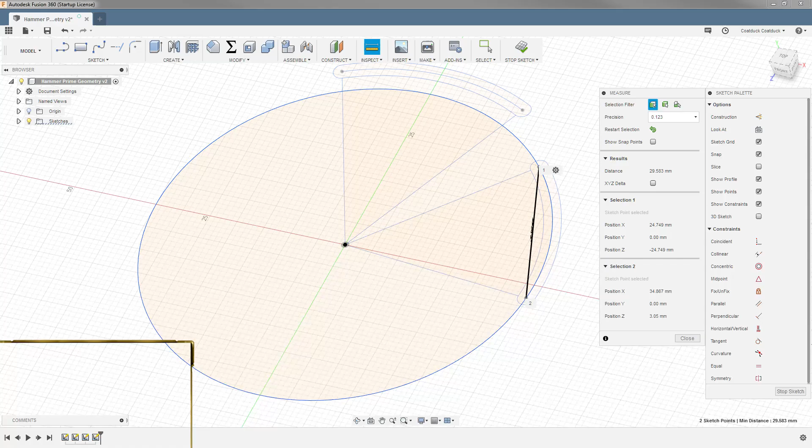What? Okay, now I feel like less of a dunce, because this is definitely Fusion fucking up. Yeah? Okay. And now I can move. Alright, it's fine. Everything is fine. So that distance. Oh, thank you. Eleanor, say something in chat. For fuck's sake. Okay, maybe I'm not such an idiot. That was impressive.

Is this a complete blaster made from scratch? Is it made from scratch? Yes. Is it a complete blaster? No. I would like to think of it more as a prototype thing, just to get geometry correct. So it's not going to be something that I'm going to take to a war. It's something that I'm going to build and put in my pocket, or not at all. I'm going to build it and I'm going to test with it, and then that's going to be it.

See, I'm not sure why this isn't a precise... Did I measure this in degrees? God, do I have to go back and watch my own stream? 50 degrees. Okay. Eleanor now wields the oof hammer. That's funny. Okay, so let's look at that sketch. So this is the Hammershot geometry, and the Hammershot has really nice geometry. So I'm probably going to take a minute and just try and remember what I was doing before.

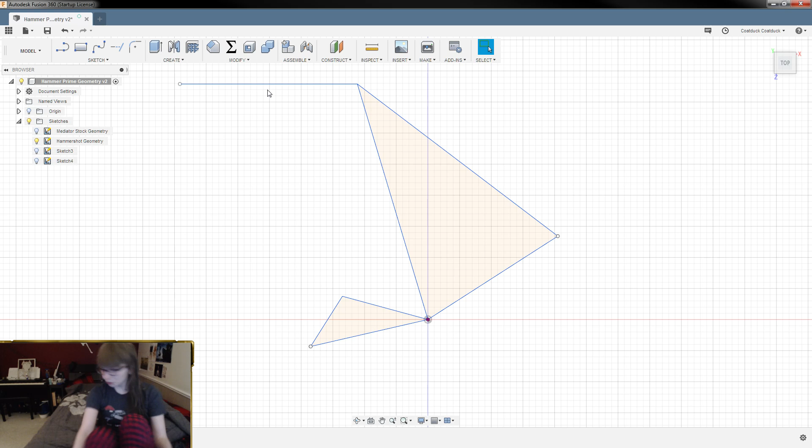Oh, I have a space mouse I could be using. Hold on. A lovely patron of mine, David, who's working on some really cool stuff actually, sent me a space mouse. And I'm just getting used to using it, so you guys are gonna have to forgive me when I flail around like an idiot with it. So far I have learned to not completely screw up with it, and programmed memes into it, so I need to get better with it. I'm told it can be quite productive. The only problem is I don't have room on my desk for it. If you look at my desk, the mouse is half hanging off the desk. I got my touch monitor, main monitor, and then side monitor, so it's a mess.

Let's get that open. Alright, now I can spam memes. Alright. Hey, is it not? Do I have to reinitialize Fusion in order to make this work? I'm not sure. Hold on. I think I do. Now you can escape capitalism. It's such a good meme.

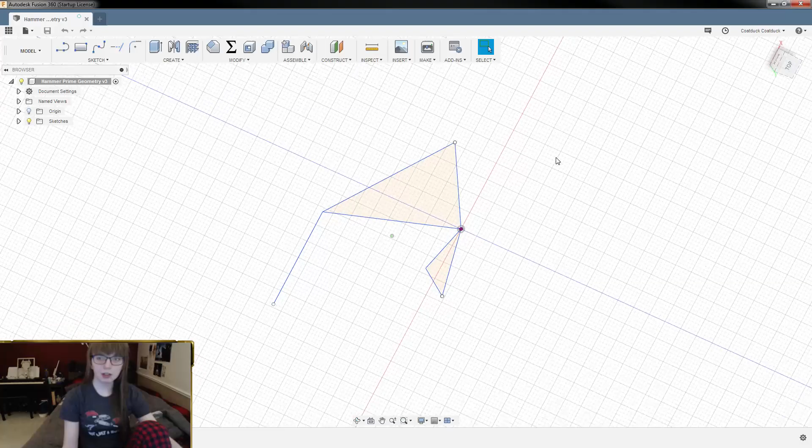See, I'm not sure. Oh hell. I need to get better at this. It's a 6-axis mouse that I'm, like, controlling with my hand, so... Okay, so... So if I'm remembering correctly... Okay, that's just a fucking circle.

I'm good for now. Thank you, though.

Oh, hell. How do I do this? I'm not good at this. So if I'm remembering correctly, what we're dealing with is the seer needs to be... I'm not sure what the correct word is. Tangent? Whatever the... perpendicular to tangent, I guess, whatever that is. Here.

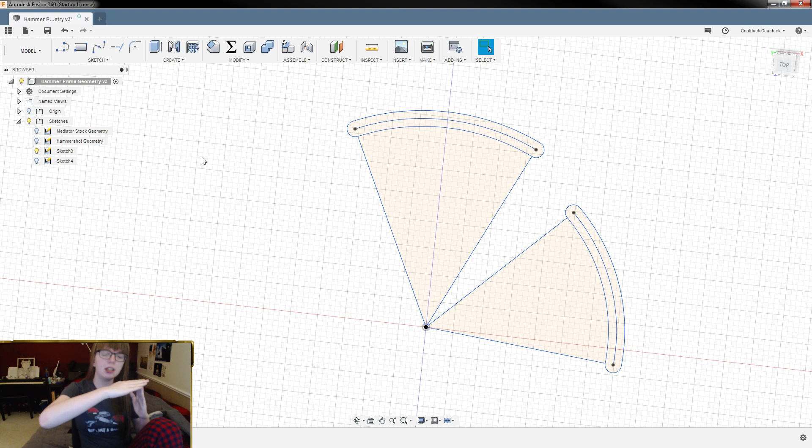Okay, so the distance between the pivot and the seer location, the larger that distance becomes, the more precision you have, and the easier the trigger pull. So we want that pretty decently far away. Now the Hammershot, how far away are these 2 points? Now they're offset, but they're about 19. So we could go 20, maybe even like 22 or something on ours.

There's also no need to specify the location of this, so it could be... Oh no, because you kind of want the seer position to be like flat, like 0 degrees, I think. No, I guess you could move it. Yeah, as long as the seer surface is circular with the radius centered on the pivot, and the seer surface from the hammer comes out from the pivot of the hammer. That could work.

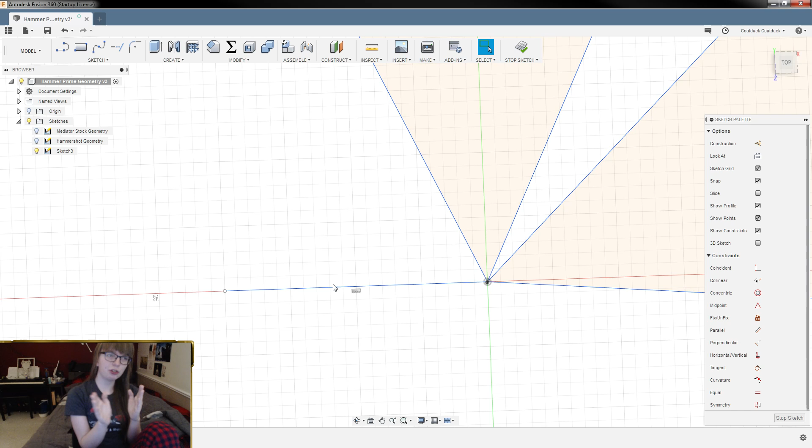Now, the distance from the hammer seer surface to the trigger seer surface will determine how long of a distance you have to pull the trigger to rotate it out of the way. Now that can also be changed by the degrees of motion that you put in. So you could have a larger or narrower surface. However, on a larger surface that's closer in, you're going to have more friction, because you have to move more material across that area.

Oh god, Eleanor, that's horrific.

Okay, so what is it in the Hammershot? The distance from there to there. Okay, so it does just automatically put that there. There's nothing I can do about that. It's 9.5. So realistically, we could go with 10 and get a slightly smoother trigger pull. So our center point is there. Now that is in the primed position.

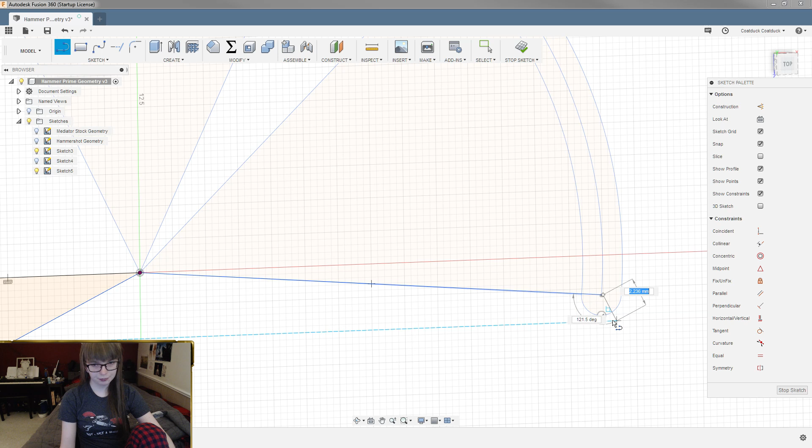So we're looking at the back of these slots. So this line and this line is our top piece of geometry. Okay, so I'm gonna stop sketch and I'm gonna do a new sketch based on this one. Whoa, nope, something wrong. So that's 35 at a 5-degree backward angle. Excuse me. Random hiccup. Hopefully they do not persist.

And this one is gonna be... Still not gonna let me do it, but it's gonna be 39.5? That's obnoxious. Why am I like this? 39.5 and 65 degrees. And I should get rid of that construction line too, because I don't know what it's doing. So theoretically, oh, that's in its primed position. I'm not sure if I want it in the primed position or in the...

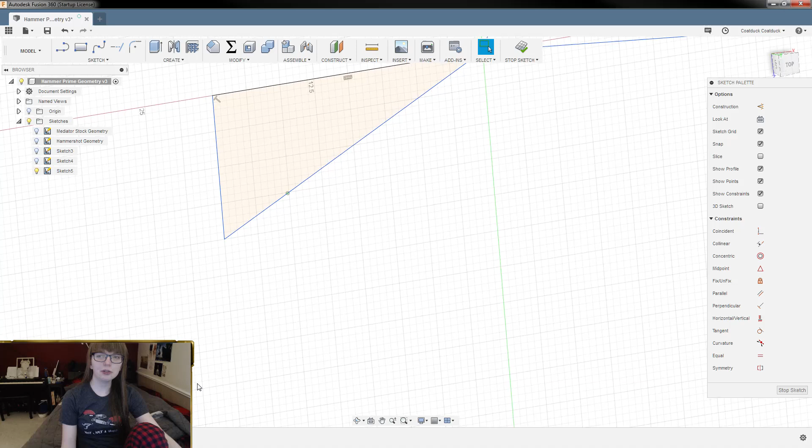Oh god. Seriously, learning to control this knob in 6 axes without accidentally bumping any of the other ones is ridiculous. Okay.

So this means that as our hammer rotates forward, like so, this piece is going to swing downwards. So that's the limit on this, because the longer this arm is, the better, right? So the limiting factor is the trigger well.

I really wish I could just sketch on top of this. I might have to do that.

Why are there only 10 watching? Because not a lot of people... Well, 1, it's Saturday night. 2, there's not a lot of... It's Sunday night. My roommate corrected me. I knew that. I said it wrong. Yeah, so, 2, not a lot of people give a shit about me doing math for 3 hours. Same thing happened on the last stream.

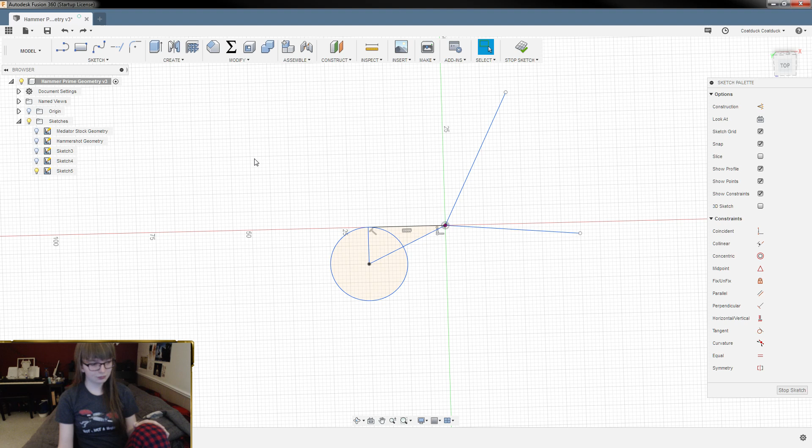I need to bring in a Nerf dart for scale. For real. This is ridiculous. I think I have a box of darts laying around here somewhere that I can steal from. And then calipers. I said calipers. Okay. I got this. I know I've already modeled this before. That's fine. You know what we're gonna do? We're gonna model this in a separate document in my bits folder so that I can import Worker darts for scale. Might even do waffle too because I'm that anal. Alright.

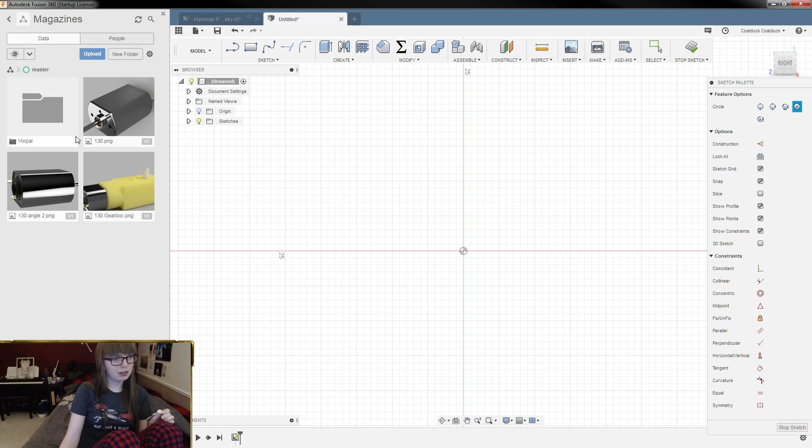Oh, Christ. Looks like my numbers were wrong. Okay, alright. Let's also open up magazines. Vorpal. Literally does not matter which one I opened. Okay. Radius of 6.5, which makes it 13 millimeters in diameter. Yeah, it's a fair approximation, I'd say. Out of curiosity, what did I make the length here? 29. Yeah. I'm basically gonna copy this exact model, except do it in a new document. Because, you know. Okay. We're 3 procrastinations deep. It's fine.

12 all the way to 14, so we're gonna go in one further. And then 2.75 radius, so that's 5.5 diameter. And then the head of it is 5.5, so that's 11. So we don't want a symmetric extrude, because I want it centered on the origin. So the distance from here to here is 8. And then from here to here is 37. So if we were making it symmetric, it would be 37 total.

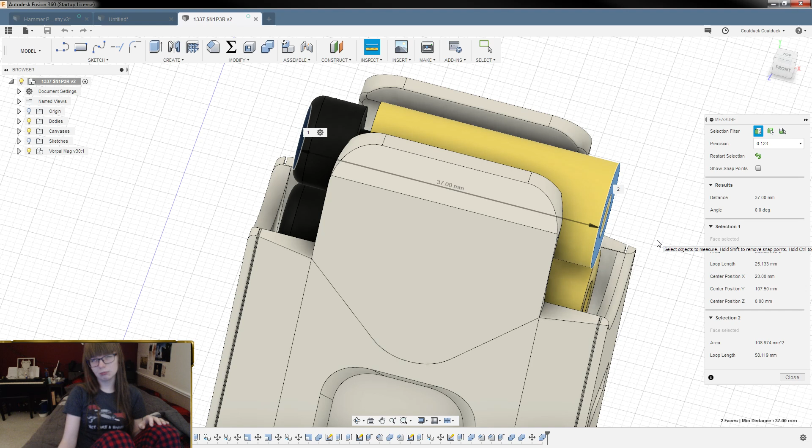Half of that is 15. 18.5. That took me longer than it should have. So 18.5, and then subtract 8 from the other side. So it's a two-sided rather than a symmetric. And then this is just 10. Well, I did that wrong. That would make this... Oh, okay, no, I did that right. Oh, fuck me. Alright. I mean, I obviously did it wrong, but... 18.5 plus 10.5. Alright, so that is the size of our foam.

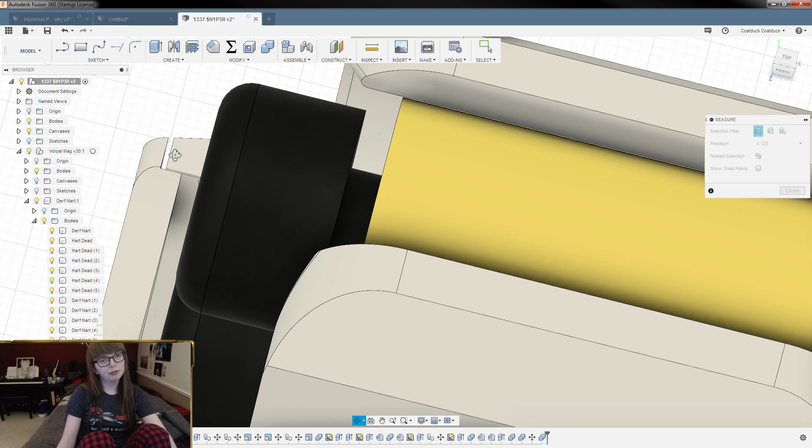Okay, that's a length of 5.5, and the distance between here and here is 1.5. So, if we take this, we extrude it at an offset. Okay, so let's extrude it 1.5 to start with, and then what we're going to do is we're going to go to an offset plane, and I think that's 10.5, so 12 minus... 12, my bad, should line up perfectly with the front. There we go. That did it. And that's how to avoid doing math at all costs and make your computer do the math for you.

Which is actually a pretty smart tactic. I mean, I'll play it off as me being stupid, but the less chances you give yourself to screw up, the better. Like, you are going to end up with a better quality product if you make it impossible for you to screw up, right? Like, that's why I always check with a calculator. That's why I always double check in chat to make sure I'm not being a dumbass. It's just making sure that I am not gonna screw this up and end up taking like 3 times as long to do something.

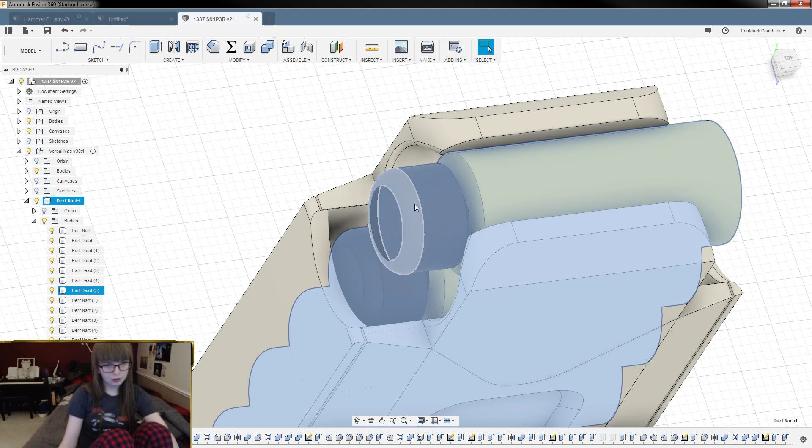Okay, so admittedly, I don't know how large this dart head has to be, so I'm gonna go with 5, and then we can adjust it when I'm wrong. 6.5. Okay. And then where's that dart body again? And then I threw a chamfer on here that looked nice, and it was... Wow, I did that a long while ago. Oh, god damn it. Alright, fine. Can I edit feature from here? Huh. I might be able to. No, I can't. I lied.

Distance there. Oh, actually I might be able to just... Nope. I tried. Wow, it really doesn't want me to... Alright. That's not helpful. I guess I could reverse engineer that and figure out Pythagoras shite on it. Then again, I am just going for what looks right. So maybe I should shut the hell up, because I'll probably come up with the same exact thing.

I feel like Hasbro copied Xavier with the Titan. I had a similar thought. Not that there's particularly any legal recourse that could or should be taken, but...

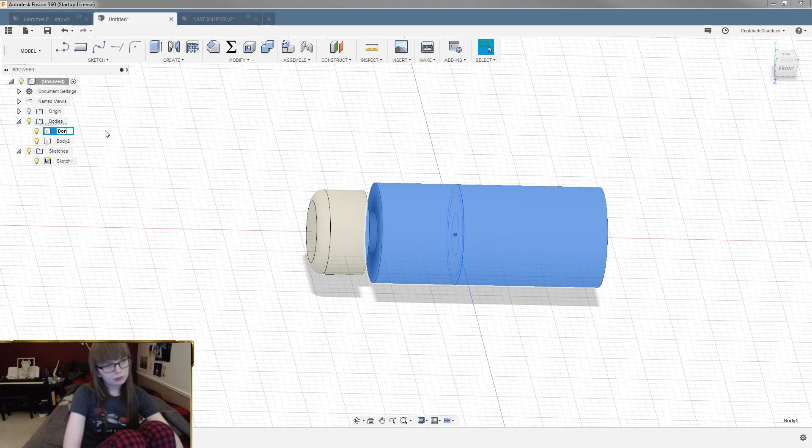Rubber soft, plastic matte. Probably miscellaneous air, rubber soft, and then what the hell? There's a ground plane? That's awesome. Gemstone? That's awesome. Don't tempt me. Paper. That's super rad. Plastic. I don't know why it's taken a whole bunch of these out of their folders. It's particularly obnoxious.

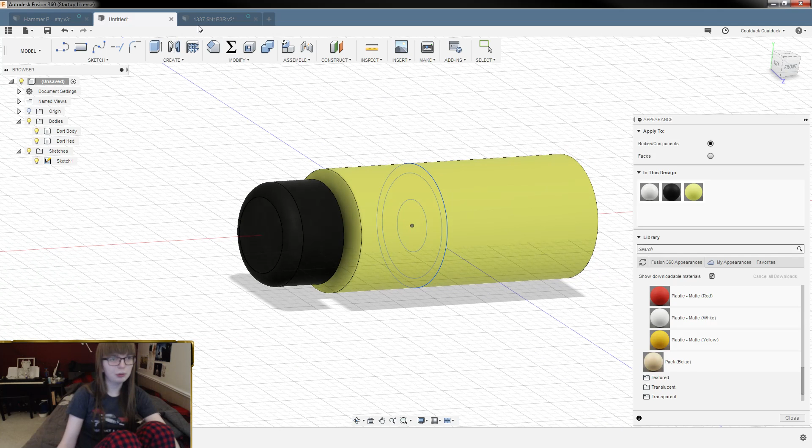Would it be overkill to put the Worker logo on the side? Like, I could do it. It wouldn't be hard. Hi, we are currently 3 stages deep in procrastination, I think. At this point, you sort of just have to accept it. 225, 233, 105. That looks wrong. We'll double check that. I mean, I know it's wrong, but we'll double check it. It's too green. 233, 105. That's bizarre. 255, 233, 105. Oh, 255. Yep, I'll do it. That looks right.

Hold on, I'm gonna see if I can find a PNG of a Worker dart, or a PNG of the Worker logo. Looking like it. Oh well. I'm gonna pretend that I am not currently going to Worker's site to see if I can find a PNG randomly located on their site. No, okay. This is dumb. I'm being dumb. Let's not go 4 procrastinations deep in a project. Let's go up to MISC parts and save. Worker dart. It's in the wrong folder. Alright.

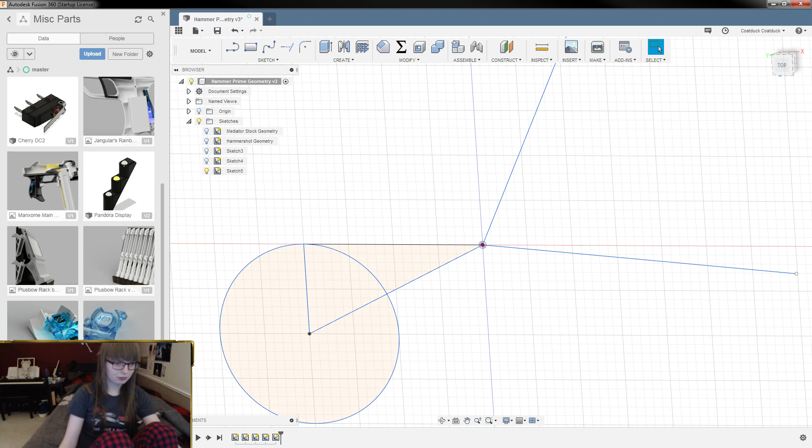Ah, crap snacks. Should have made that... To go in. Make that invisible. And close it. And then pull it in. Here we go. Hey, Homely. Okay, so it's not as bad as I thought. I was a little concerned.

Oh. No. I need to get better at this. Seriously, I get why they call it a space mouse. It really feels like you're in 0G, trying to figure out how to navigate. Okay, I'm looking at it from the top. Fair enough. Nope, it's rotation on axis. Alright. I don't necessarily know if this is going to be more natural for me or not.

Do things. Hey, Valor! Sending out my wheels tomorrow. Sweet. Maybe I'll design a cage and a blaster for them.

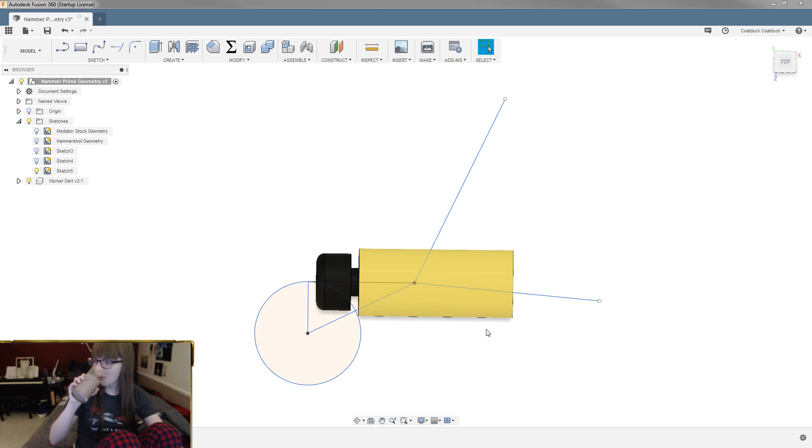Alright. So let's... I like my keyboard shortcuts a lot. So having to switch between the space mouse and the... And you need your normal mouse, because that's how you click on things. You can't do that with the space mouse. It's literally only used for navigation. So I'm not sure if I... Like, the only thing is,

I have the space mouse set up so that I can post memes. There you go, my Discord. You're welcome. Yeah, with one button push I can post and I can type out and send the links to various memes. So I definitely dig that about it,

but I have yet to determine if I can justify its existence. Honestly, most importantly, it's the desk space it takes up. Because I definitely see its use, but I'm not sure if its use outweighs the fact that it takes up my desk space.

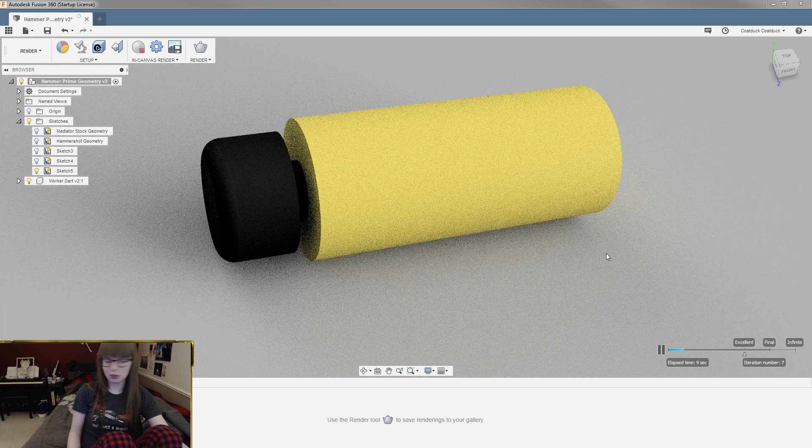space mouse. A space mouse, or Space Mau5, if you will, is a 6-axis mouse. So your normal mouse is 2-axis, so you've got up, down, left, right. Whereas this has up, down, left, right, forward, back, and then rotation around up, down, forward, left, right, back.

My internet is filtered through a potato. There's a GLaDOS joke there, and it's like right on the tip of my tongue, and it's just not happening.

Okay, the dart looks fine. Vanity aside, okay, so our sear surface. See, I'm not sure what I should work on first. Is the biggest problem here. I think what I should do, get this worker dart out of here. And then just select all of this stuff, including this.

Oh, okay. Apparently I have to deselect the... And then... I think X makes that the construction line. Oh, I have to be in the sketch. That makes sense. Okay, so now this is all construction geometry. Actually, I think I want this circle back. Oh, fuck. Nope. Fuck that right up. I think I can actually use bits of this circle. I probably want to go out to the edge, and then 95 degrees here for the front of the sear.

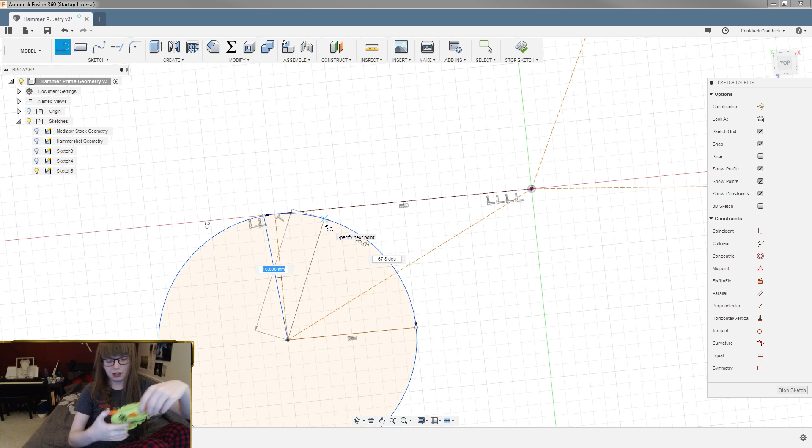Now, this is going to determine how... See, this is a difficult thing. How many degrees of rotation I want in this trigger before it catches. Or uncatches, I guess. This is a double strike with a really good sear, actually. I have a modified double strike around here somewhere that has a really nice trigger pull. And being able to find the number of degrees before it breaks is, I think, the term. If it's not the term, it should be.

I have this trigger 3D modeled. I could literally just go in. I don't think that would work. No, it wouldn't. Crap. Actually, I want that one to be not a construction line either. You know what? I don't have the double strike geometry in here. That would have been clever. I could have been very smart. Alas.

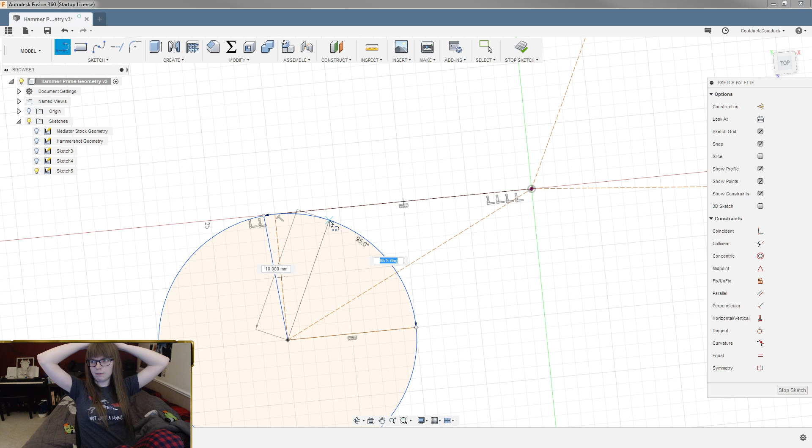Okay, so if we want to make this, like what? Like... I have no idea what that swing is. It's like maybe 20 degrees. So that would be 90 minus 5, minus... No, 90 plus 5 minus 20. So minus 15. 90 minus 15. 75. That's not enough. Let's go back to 65.

I had a friend I used to game with. His name was 65. He got banned from a lot of games because he had a macro that would post the "What the fuck did you just fucking say to me, you little bitch?" copypasta. Just the press of a button. Got him in a lot of trouble. I told him maybe he should not do that.

He didn't listen. Okay, so that's looking like our sear geometry for the trigger. Then let's throw in a 2.5 millimeter hole. That's a guess. I won't lie to you. And then at minimum, that's 2.5, and we want to add 2 millimeter wall. That might be small. Might be too small.

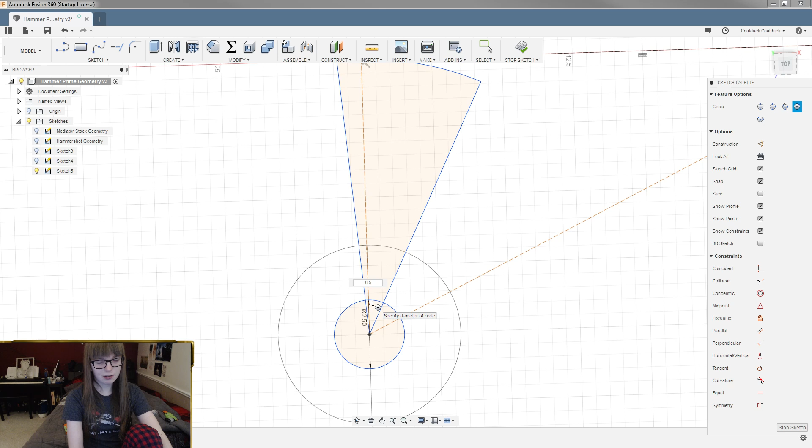Okay, so 2.5, and then let's make that another 6.5. And that should give us 2 millimeter wall thickness here. Right? Right? Yeah.

Yeah, that needs more reinforcement. However, I need a circle. And I'm beginning to understand why Hasbro did some of its geometry. Okay, so to clarify here,

what we're looking at is the arc that your hammer sear is going to pass through. So this is going to be construction line 2. And as you can see, it clearly impacts here. Now, we could do something silly, like we could just make this smaller, but that's not a good solution.

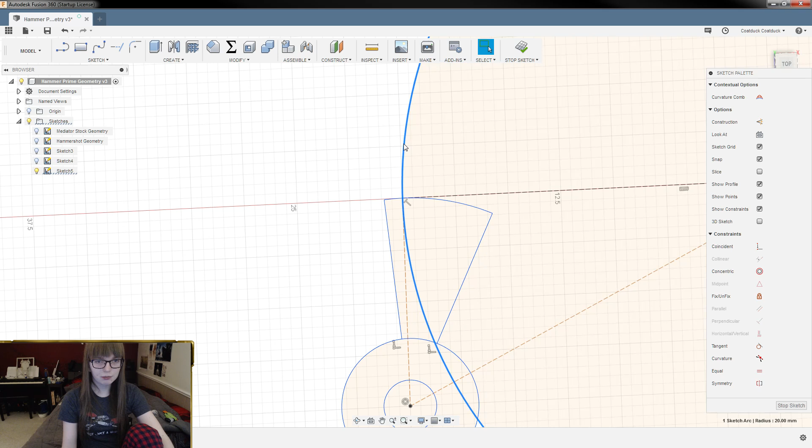Why is that saying 20.2? That's not good. That's clearly an indication that something's gone terribly wrong. What the actual fuck? Okay, that fixed it, apparently. Maybe it was trying to do something weird and tangent and not quite right. So...

Hasbro's solution to this problem... So we could make these not intersect by basically having a gap that it can swing through. But that's a terrible solution. Just saying. It would work, but not exactly elegant.

We could bring this inward. So the Hammershot geometry, what is that? That's 14. Yeah, so we could bring this significantly inward and still have an increase over the Hammershot. Yeah, I don't know why I made it that large to begin with, if I'm being honest. I don't actually remember.

No, that's not correct. This is gonna fuck up everything. Yeah, as I thought. Okay, so let's take these lines out. And this one too. And then let's see if this will allow me to move this sketch. That's looking promising. Hopefully it doesn't fuck up everything.

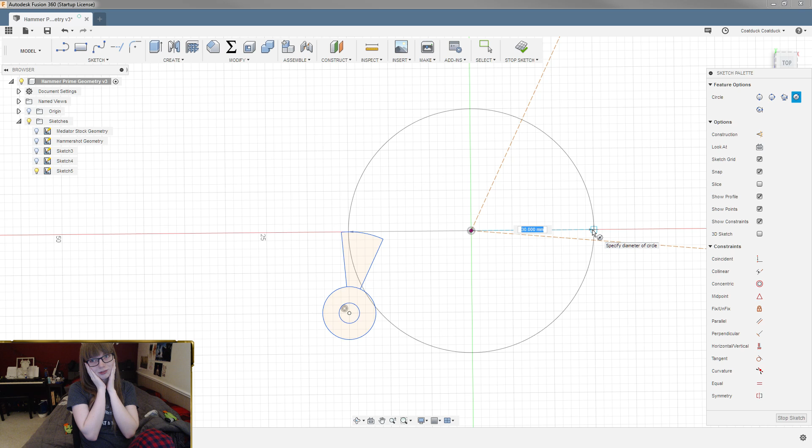Alright, so the Hammershot is 14. So if we go to 15, that almost deals with the problem. Problem is, because they have to be perpendicular, that basically sets the amount of clearance, unless we want to move away from it being perpendicular. Which then you sort of have a bit of a jamming at that point. But I guess technically... I don't like that solution. It would be easy, though.

Ah, hell, I have to take apart a Double Strike now. Need to get my screwdriver first.

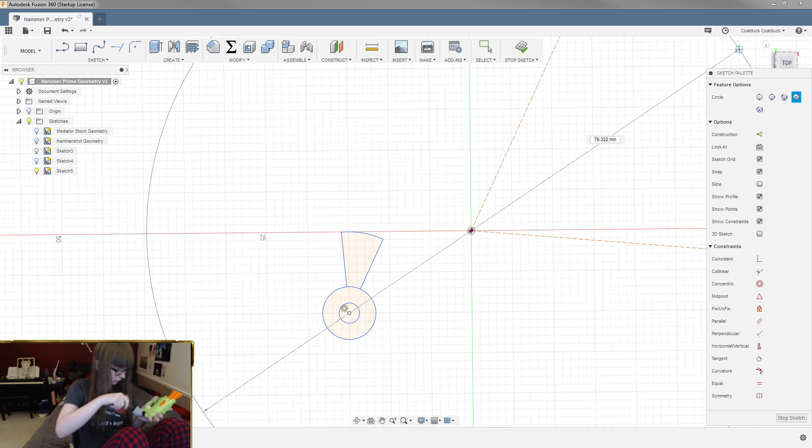This Double Strike has actually served me quite well in foamy combat. The trigger's not quite right though, admittedly. Boom. Let's take apart this Double Strike. Oh, that's not ideal. Just looked inside of this and not pleased with what I found.

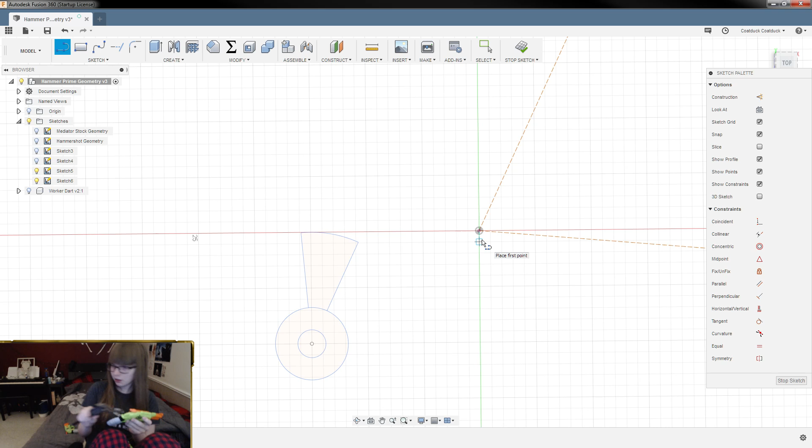So that is a distance of, hold on, I need to stop sketch. And then we're gonna do a new sketch. And this one's going to be, shit, we have to find the angle. That's like almost perpendicular. Call that 1.5 millimeters high or low, depending on your perspective. Alright.

And then this is a distance of 12.5 millimeters, I seem to recall. So it's like 15.5-ish minus 3 for the diameter of the pegs. 15.5, 12.5 is the length of that. And then throw down a circle that is 8 millimeters, I think we said. Ah, crap, I have to measure it again. And that was the really difficult measurement to get. Actually, I'm done. Nope, I do have to do that again.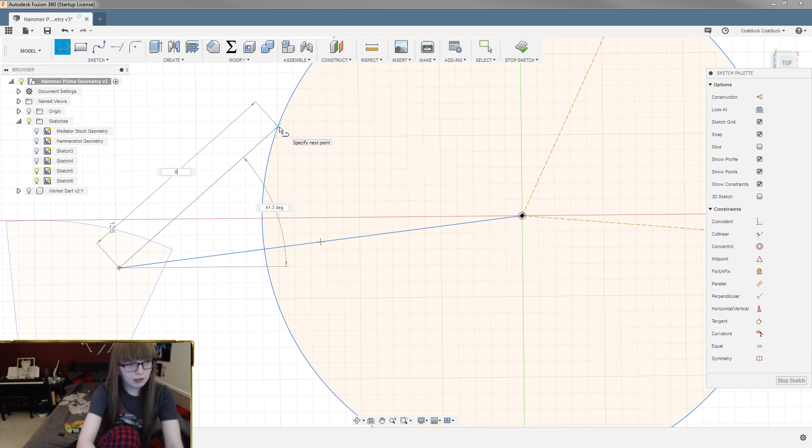Please don't explode, please don't explode. 9.5 minus the radius of the post, which is 8 total. Gotcha. Okay, so this is an 8 millimeter line. Right. I remember doing that last time too. So we want to go to 16 here. 8. Alright, and that's the geometry on the Double Strike. Which is admittedly closer to perpendicular. However, it's so small.

This is double strike geometry. And then let's slide this up. Can I do that? Just off the sketch to slide it up in the ranks. No? Can I not do that? No? Okay. Alright. Fine. Alright.

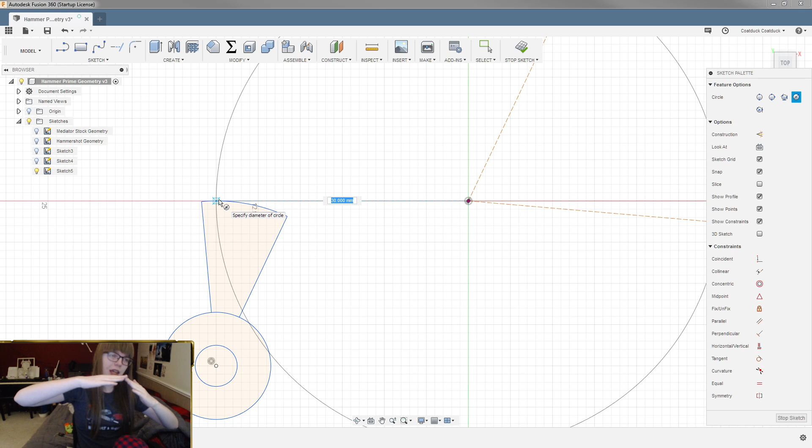So Hasbro, see, they should be perpendicular, but that won't work, I think. So Hasbro kicks them outwards to give you more clearance between the pivot location of the trigger and the surface of the sear as it swings down out of the way. I think.

So that's the difference between, if we stop the sketch and look at double strike, which, did that actually work? Holy shit, that actually worked. We edit the sketch. Now we can see that, that's cool. Alright, nailed that. I think that's the end of the album. No, it's not. I'm gonna go back to this. Okay.

So, with the hammer shot, okay, so I think I'm slowly nailing this down. Yeah. Okay. So, this length pretty much exclusively determines how easy your trigger pull is going to be. The angle here contributes as well. Now, if we measure, out of curiosity, this is a 116-degree angle, so call it 15 degrees. And this is 102, so call it, well, that's within our margin of error, actually. So the angle here is actually really similar.

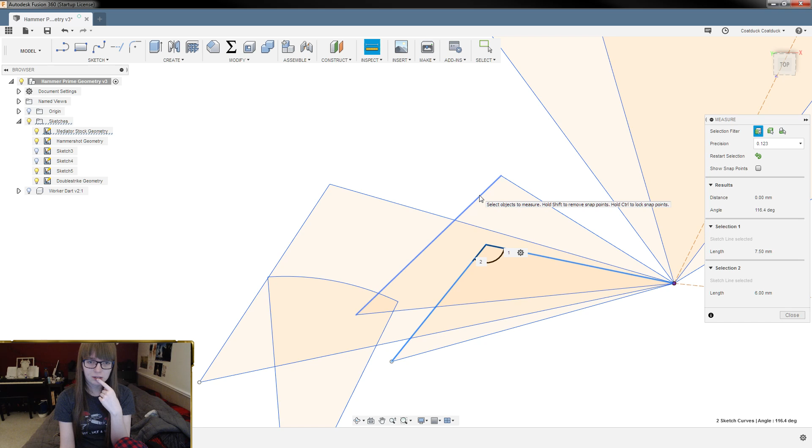And the Mediator Stock Blaster, which has a horrible trigger pull, is more. Interesting. Interesting. Okay, well then, never mind. However, the angle on these two is extremely similar. I mean, the Mediator Stock Blaster is a piece of shit. So I'm not mad about that. But I actually think that might be something.

Okay, so to sum up what I've just been mumbling about. These two lines are the distance between the sear surface and the pivot point. So the radius of the sear surface, essentially. That, in combination, very slightly in combination, realistically the way they've done it is probably so close that it doesn't matter. Those two things handle how nice the trigger pull is. Or how nice it can be.

If you're dealing with a rounded sear surface on the trigger, with the radius being at the center of the trigger pivot, then that all applies happily. However, if you have a flat sear surface and a shorter hammer sear surface, then that's going to cause you more problems because it's more leverage there. So

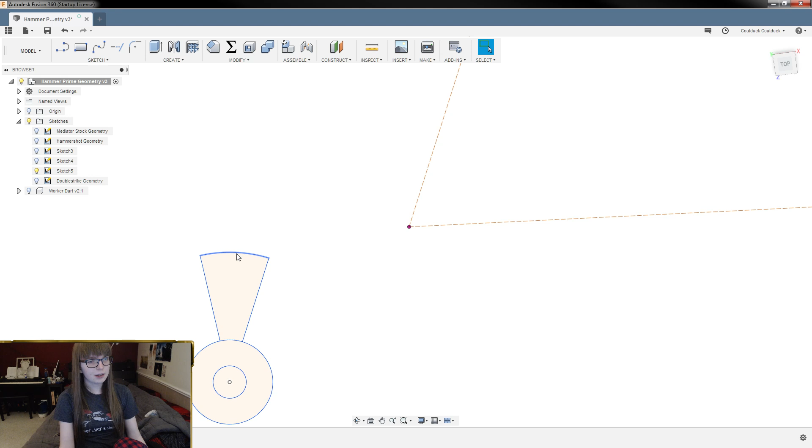Alright, let's get rid of those two. And then I'm afraid we have to get rid of this as well. So let's go back in, edit the sketch. What's that? Radius of 10. Okay, I can handle that. So we want... What the fuck is your deal? Why are you doing that? Holy shit. 15.

And then we want that to be 10, and we want this to be 105. Because apparently we're listening to Hasbro now. What has the world come to? I really don't like that. Just for the record.

So we go 90. So we want this to be 80. And then this is going to be 50 degrees. Too many lines. Alright, there is our hammer sear geometry again. And, yep, the sear surface clears it by a mile even. Like, we got room to go.

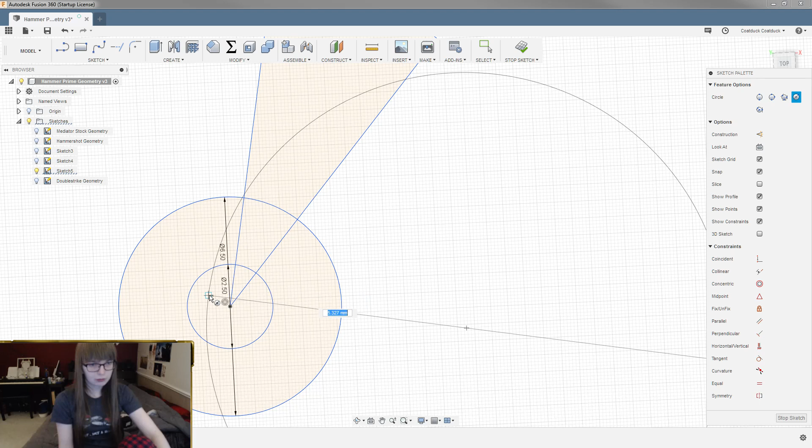Oh, fuck you. Nine, 10. Let's see if that clears it. Probably should have just left that circle there. 10 clears it. Just barely. That's funny. Okay, so that's our maximum there.

This we could probably pull in substantially, because this is just strength. Although most of the strength is going to be down here. But we can sort of brute force it, really. And I think if we do that, by definition, I really think that would be fine. This would make an extremely strong sear. I actually think that's pretty much the strongest you can make that sear. Part of me almost wants to bring this in a little bit, just to give it a little clearance. But it shouldn't be a problem.

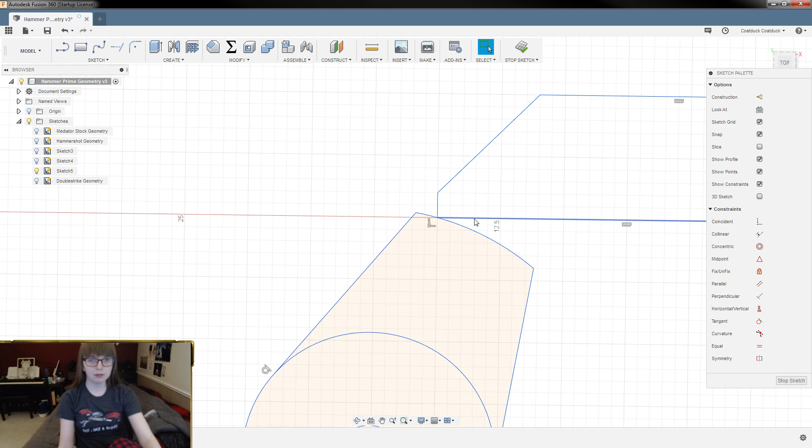That's 5 millimeters. Alright. So now we're actually drawing in geometry. So this is good. I hate that that's a thing. But the force needs to be applied that way.

Okay, I had a thought. Alright. If we abuse... Okay. This is a dumb thought, but I actually think it might work. If we go in like that, and then use this geometry as part of it, we can then have a flat contact patch. Like an even contact patch to avoid wear in any particular area.

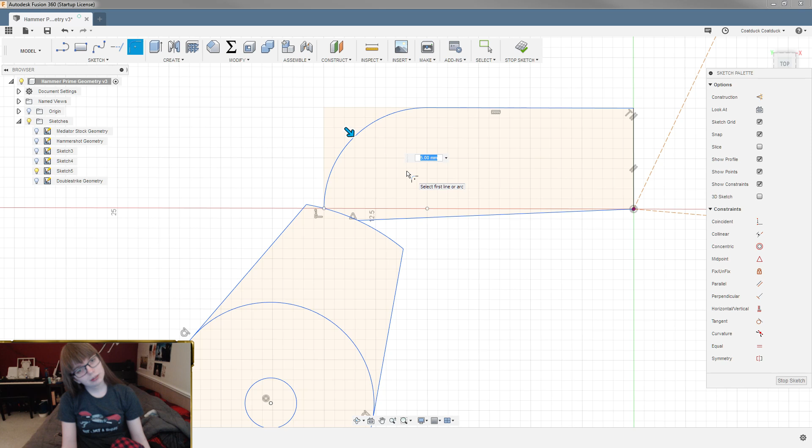Okay, this is actually... I'm really proud of this. This is like the cheatiest cheat ever, but it's actually gonna work. I think I'm actually gonna extend this line. And then come in with a fillet on the... Oof. Yeah. And then all that needs to happen is this point needs to clear the radius of the circle.

Whoa! What the fuck was that? It was working fine until I hit enter. Okay. That's not what I signed up for. Part of me is really tempted to freehand this, which I might do. Yeah. Let's get a spline in here.

My good buddy Winston can look at me in absolute horror while I use a spline in a geometric part. He'd either be horrified or impressed. I really don't know which.

Go. Wrong button. Alright. You know what? I actually think I can just delete that point. Whoa! That's gonna be a no from me, dog. Alright. Spline from here to here. And then we want to grab that, put it there, grab this and put it here. That looks really wrong to me. Could not tell you why. I mean, it would work, but still looks wrong.

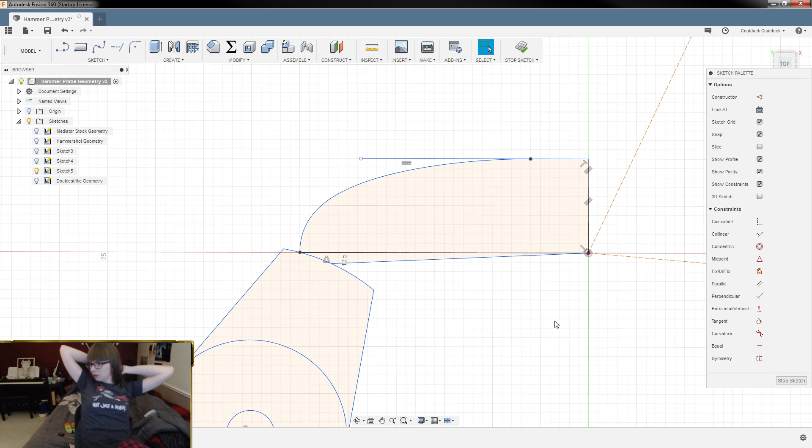Saw Hammer Prime in the title and we'll have to stop by. Have a look and see. Well, yeah, there we go. Currently designing a prototype to basically check my math on Hammer Prime blasters. And if it goes well, I'll do something cool. Like, build a whole blaster. If it goes well. Actually, I'll probably do it regardless.

Man, this geometry is not critical at all, and it's just bothering the crap out of me. Like, I can't seem to get it right. Could be because of this angle here. Which technically I could avoid having this angle entirely if I took that midpoint and just went like that. Which is fine.

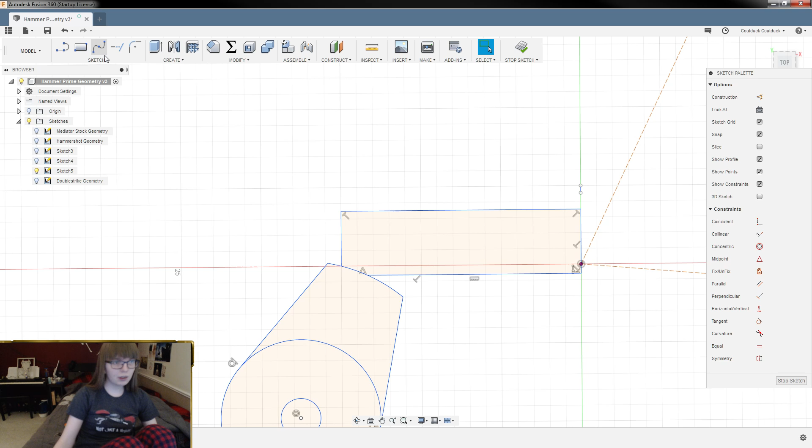Like, honestly, this would do it. This would... No, actually, it wouldn't work. This would need to be that, at minimum. It would need to have that much curve in order for it to work. And that would also give it the maximum amount of strength, which makes me want to go for it.

Hey, yo. They're going alright. Could be going better, admittedly.

Just round over this corner here, give it a 1 millimeter. Technically, wow, that was a complete failure of words. This geometry is entirely not critical, for the record. I'm just being an asshole about it. And then let's make this pivot point a good old 2.5 millimeters. And then go to 8 millimeters just because this is like a super beefy section. Why the hell?

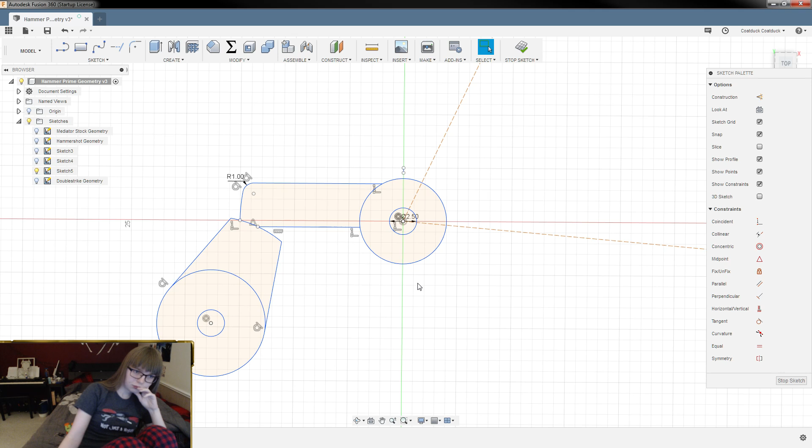Go back into our Hammer Prime stuff. Actually, I think Dread Pirate Roberts the... What are you, 6th or 4th? I know there's an I and a V, I just don't remember which order they're in. I am almost certain you could tell me, but I think I have it in here. Yeah, I do.

What is this? Just to give myself... It's like 5 millimeters. Yeah, I could do 5. I could buy 5. Not 2.5. That's for damn sure.

Okay, this is hammer. I don't know what I'm gonna name this thing. Hammer action. We're gonna call it Project Ham. That's the name of this blaster now, just for the record. It's called Project Ham. It's canon. 5. And we want this to be a new body.

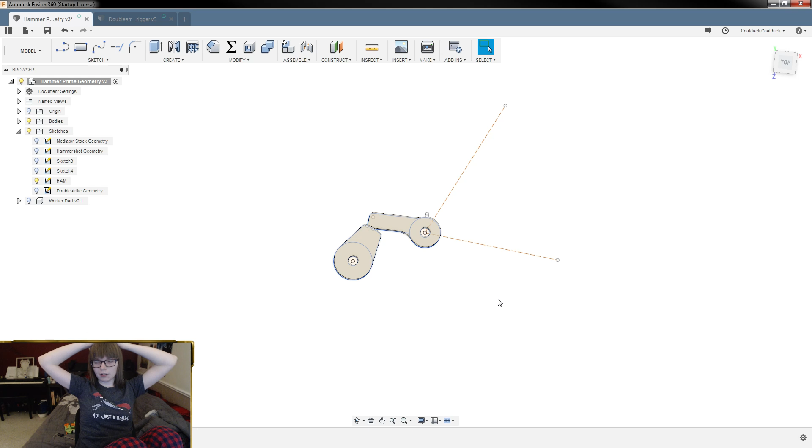There are no forces, as far as I'm aware, on the back here, the spring rest area. As far as I'm aware, anyway.

Whoever designed this model hates people. Are you saying I hate people? Because I'm currently designing this model.

How to smoothly rotate around this part. Nope, that's wrong. So I have to tilt to rotate this way, and then rotate that way. Oh my god. How? Oh god. My brain is having to do math live in order to rotate this part. Holy fuck. Oh. Okay, let's just all agree that I'm not very good with this Space Mouse yet.

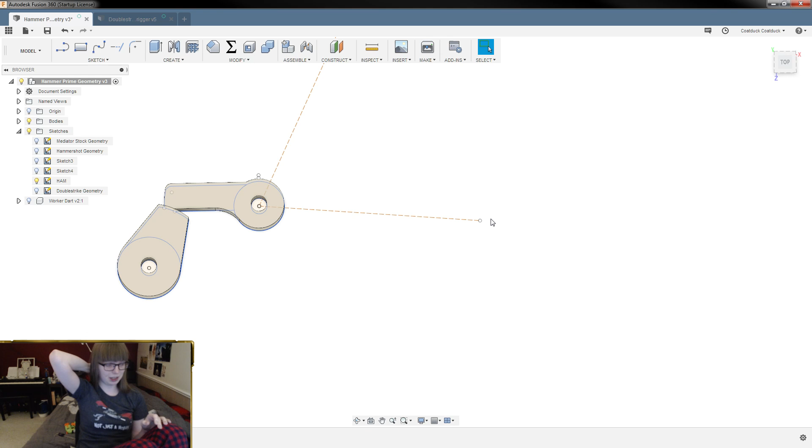Okay, so the point is, at the end of this line, here, where the spring rest, or where the spring guide sits, there shouldn't be any forces ever pulling it back. In fact, I honestly feel like you could probably get away with not having a back on that. I mean, not that I would or will, because that's dumb. But you could, theoretically.

Okay. So let's bring this thing in, go to bodies, there we go. Hammer, and this is trigger. So we want to move copy this. Hey, I clicked. Why are you not letting me? Thank you. Lord. Okay, so if I rotate this 30 degrees, it shouldn't... Okay, so I did some math wrong, and this is actually 25 degrees, but sue me.

Copy, and then we can move the pivot point to here. And then this rotates... not that. Measure between here and here is 50. So this has to rotate 50 degrees, which admittedly wasn't precisely necessary. But hey. Oh, that's not good. Shouldn't that? No. Crap.

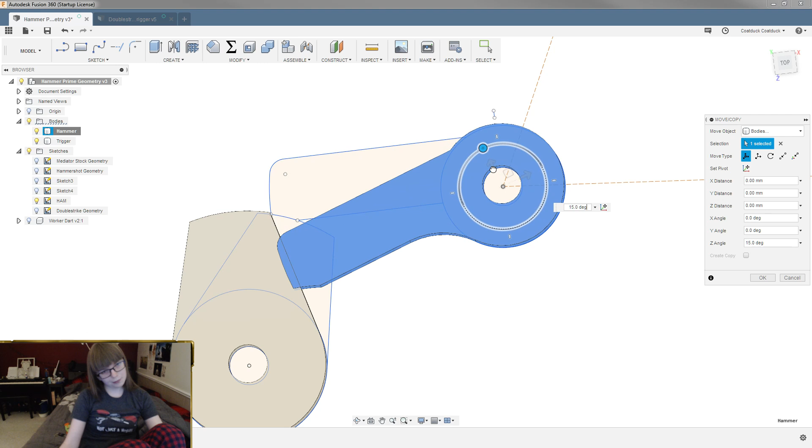Okay, so I'm glad we did this. So that's the resting position of the sear, which is actually really good news. Because that means that if our trigger is below this point, then there's no chance of it ever getting into the trigger well area. That's awesome. This is fucked though. We have to fix this. I'm not entirely sure how to do that. This is gonna be fun.

Okay. So let's go back in and edit the ham sketch, which is what it is now. Okay. So we want this to be 30. Swear to God, if you've lied to me, fight you. No, that's right. Okay. I probably should have made that on 2 separate sketches, but it's fine.

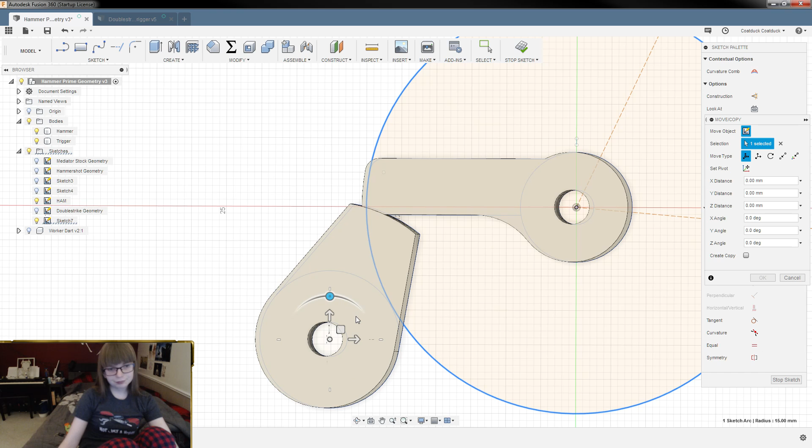Nerfenstein, how are you? You're spectacular, I imagine. I cannot imagine you being anything except wonderful.

I'm being way more anal about the exact specifics of this geometry than I should be. I really am not sure why this isn't wanting to work for me.

Nice. I respect that. Okay, I'm digging this Space Mouse, at least a little. Just need to figure out where to put the damn thing. Whoa, no, wrong direction. Whee! Just having fun. Okay, so this... Oh.

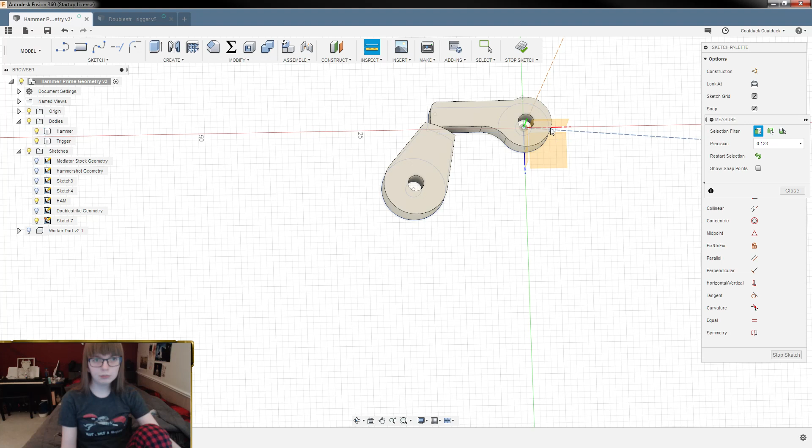Okay, you know what? I have a theory. I think that if we measure the distance between here and here, so 20, and then rotate that 25 degrees, which is the length of our trigger pull. Yeah, rotate that. Technically, I guess it's a hypotenuse, but I just need the measurement. And then I need to rotate that measurement. So where's my origin? Nope. Nope. Looks like I can't use that line, so I'll have to draw it in.

Got so great at this stuff, Alice. I'm never stuck with it after packing my printer away. Oh, I didn't know you had a printer. I feel like I probably should have paid more attention. Thank you. That was very kind of you. It's a lot of work, but I'm trying and I'm having fun. So, honestly, right now, getting this geometry right has literally been an hour and 45 minutes. Just these pieces. Because there's just so much math behind this.

Should be fine. See, what I was concerned about was because these two surfaces aren't applying pressure perpendicular to each other, what you could end up with is a force pushing down, which is locking the sear forward. And I actually think that's what applies the resistance in Hasbro stuff, apart from the fact that they've designed the geometry like a bunch of monkeys. So I actually think that's not terrible. So this should have a trigger pull that feels similar to the Hammershot, but not quite as snappy, but a little smoother. I think.

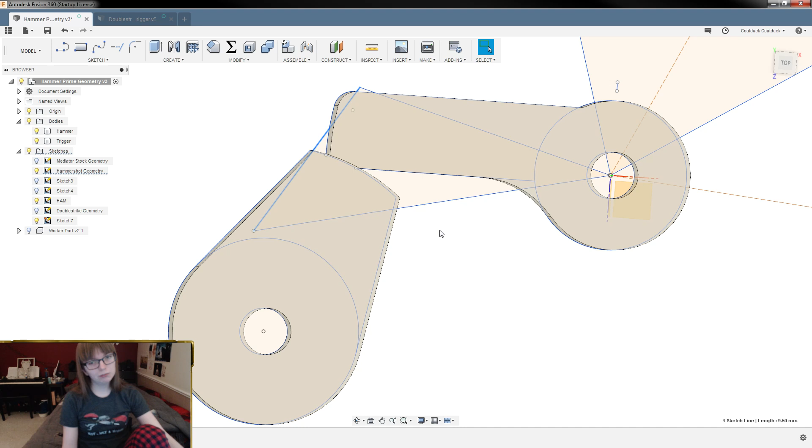Alright. Oh, I have an escape key on this mouse. God damn it, see, the problem is, the more I like this mouse, the more I'm screwing myself, because I have to find a place to put it. I have no idea where to put this damn thing. It's like awkwardly sitting on the edge of my desk, and I have to get it out every single time I want to use it. It would be fine if I had this monitor on this side, because I could scoop this right under the monitor, but it doesn't work like that. This is bothering me.

Oh, that's wrong. I want a line from here to here. And that's 28.8 millimeters. Oh, fuck you. That's obnoxious. Alright. .8 degrees. My bad. So that's 3.8 degrees. 20 and the 3.8. So that was 28.8, and we're subtracting 25 from that.

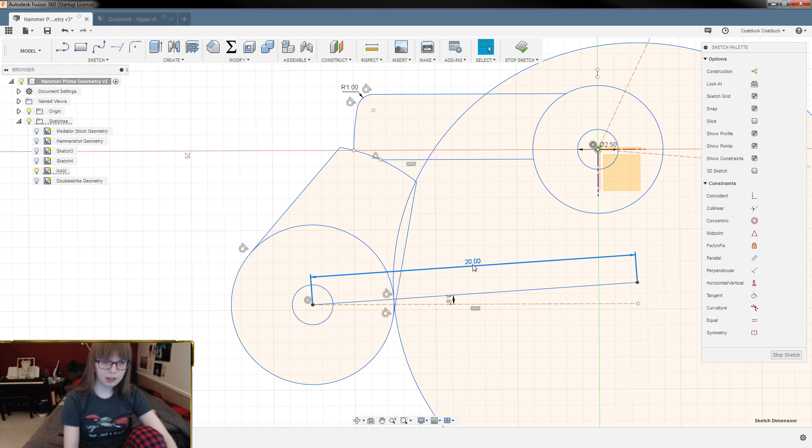I guess that makes sense. Delete the remainder there. And then trim this off. Wow, okay. Actually, that worked pretty darn well. Okay, so I nailed this a little bit. I'm kind of impressed.

Okay, so... Actually, I changed my mind. I think I do just want to trim off this last little bit, because I think from this point to this point is going to be like a nothing. My printer can't print that precisely. That's more than enough clearance. So if we stop the sketch... Darn it. Alright. There we go. Okay, so now, if we take this trigger and we rotate it,

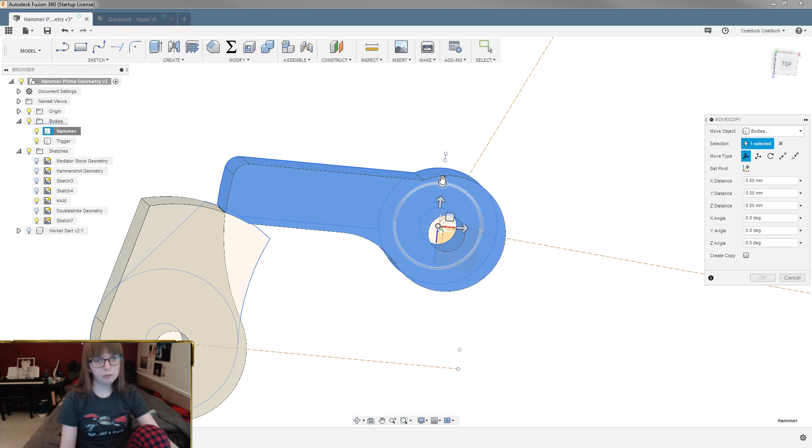Okay, so we rotate that 25 degrees. And then we rotate the hammer, and the hammer's movement is 50 degrees. Oh, you see that? See that little bit of clearance there? Ha! Oh, look at that. That's how you do some geometry right there.

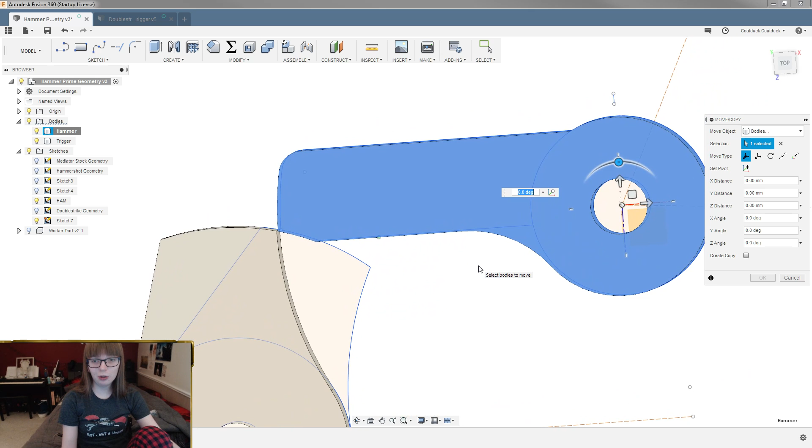No. So, our strength here... okay, I'm really liking this. Let's rotate this down 50, and then we can just roll back. So our forces here are being applied, I'm turning off the origin, it's bothering me, are being applied between this point here and this point here. That's where the compression force is.

No, it's not. It's like... Crap, how does this work? So the compression force is actually coming from this point here. So the question is, what's the path that it takes? What is the area that requires the most strength? And honestly, I feel like that involves the Fibonacci spiral.

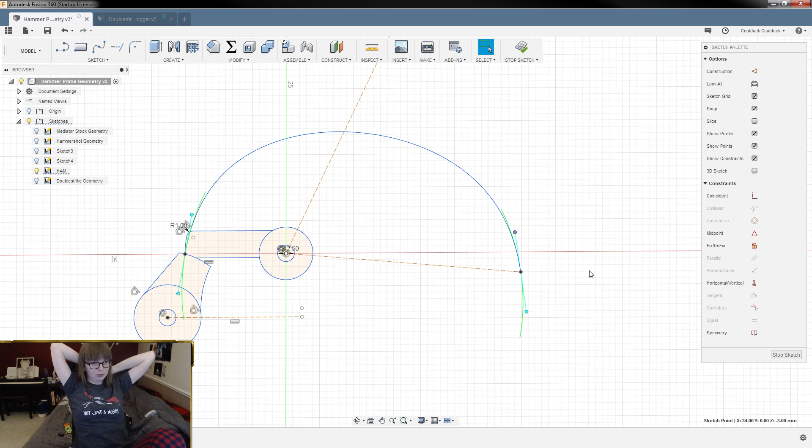Okay, that was kind of cool. I'm a little proud of myself about that. Now the question is, is there a way to make that mathematically accurate? Basically what we're looking at is we want this circle here to have a center point on the pivot and be the radius of this here, be this radius, and then this one be the same for this point.

Okay, that's kind of cool. And that's how your force is going to be applied. So if you filled in this entire area, or if you had a bar that you put in, this would be the place that would make it the strongest, assuming that we got this mathematically correct. So if we pull in a circle, right? That's diameter of 70, and then that there. Actually, we already have that circle in there, so we don't need to bother doing it again. There you go. Okay, so that's right.

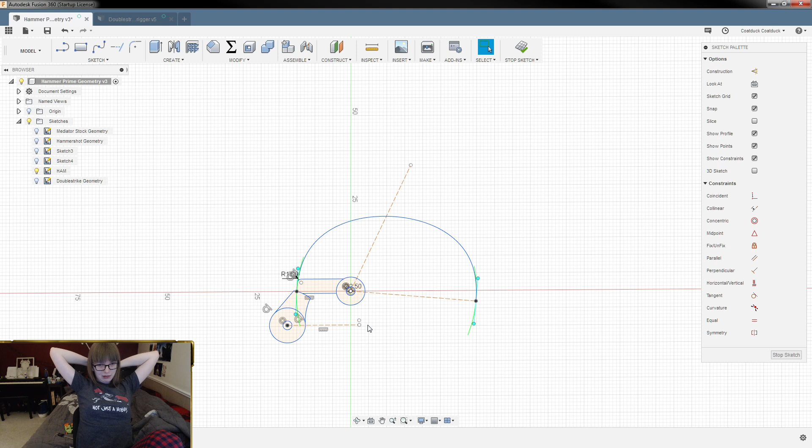Oh, quit jumping around on me. Holy shit, I nailed that. I'm so proud of myself right now. That was awesome. That's not exactly precise, but it's pretty damn close. So there's obviously some margin of error because I was freehanding it, but that should be a Fibonacci spiral. Okay, I'm impressed.

Yeah. Now, that's not terribly useful to us, because it's not precise, and on top of that, it's probably unnecessary as well. I think this is going to be more than strong enough on its own. But if you wanted to maximize strength for material, which would mean lightening up the entire thing. No, this is a bad idea. Damn it. Alright. No. Alas, I have a thought. Slides out of the way, and then that moves forward.

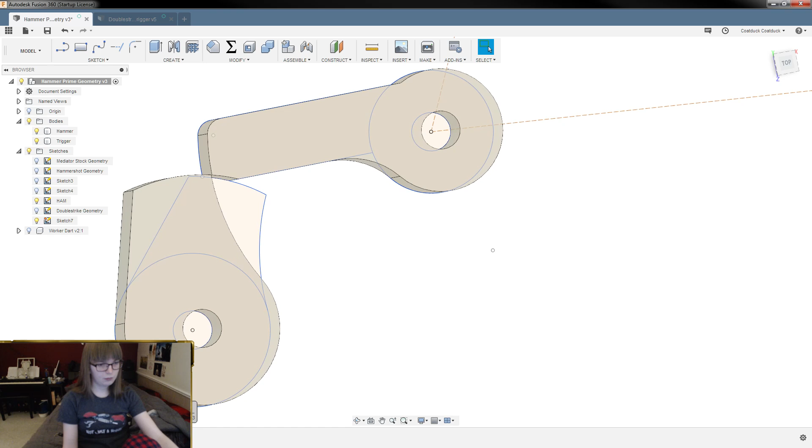So, if I'm being honest, the next part is really simple. It's a post with a hole in it. That was the hard part. This is the easy part. Oh, I hit the wrong button. Let's edit sketch. Come in and let's bring back our stock sketch and then bring in our worker dart. I was worried I was making this way too large, but that's about right. This is a really small mechanism.

I'm kind of tempted to SLA print it if I have the opportunity. Or maybe machine it out of aluminium. Because we all know aluminum sear surfaces work so well. Sorry, did I get sassy there? My bad.

However, that does bring to my attention something that I should have thought of earlier. And that is that this should be symmetric and only 2.5 millimeters. No! 2.5, not 25. Lunatic. Alright, so now it's properly centered.

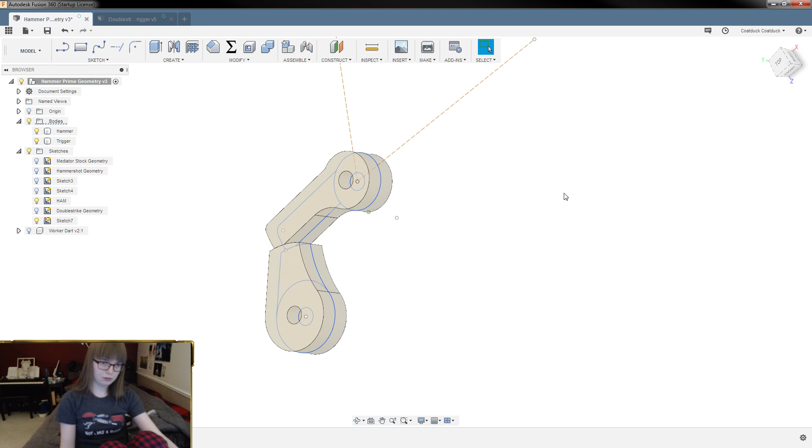Hey, remember when I talked about how I was going to design a blaster, and then I just spent the entire live stream working on exclusively the two sear surfaces? Smathy. I like that. That's funny.

Get it made from steel. I have seen people machine steel on a Shapeoko. I haven't seen Winston machine steel on a Shapeoko, and thus, I don't intend to machine steel on a Shapeoko. Whoa, hello. It would be really cool to make these out of proper hardened steel, and then have actual metal trigger and hammer. That would be cool. Have them actually be functional as opposed to the blaster parts kit, which grinds itself to the point where it doesn't work after like two wars worth of play.

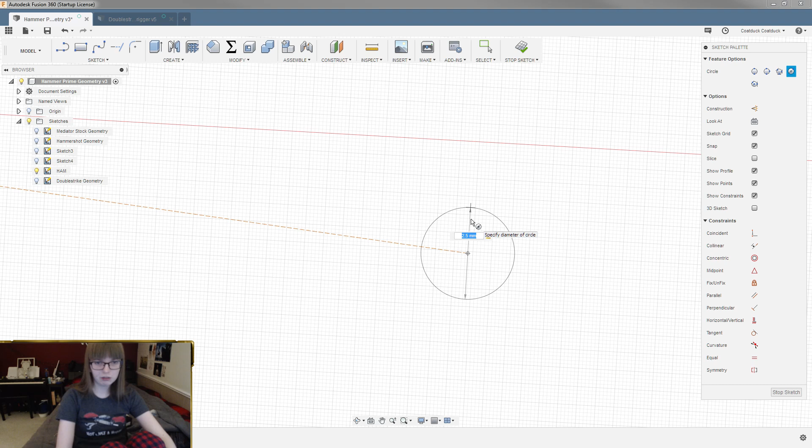Yo, let's make our high wear surfaces out of unhardened cast steel. It's not steel. It's like a nickel alloy, I think. It's some sort of janky, gross alloy. I feel like it is too.

Playing a lot of PlayStation VR lately. Fair enough. You know, I really wouldn't mind a set of VR goggles for modeling, honestly. Not even for gaming stuff, just for 3D modeling to sort of get it in my hands and...

It's not all nickel. It's like... I don't remember what it is. Somebody told me at one point they did testing on it. Actually, part of me feels like it might have been Dread Pirate Roberts, who was in chat briefly, but I could be entirely wrong about that. I know he really likes Hammer Prime stuff. And makes resin cast hammers, I think. Nice. I like that.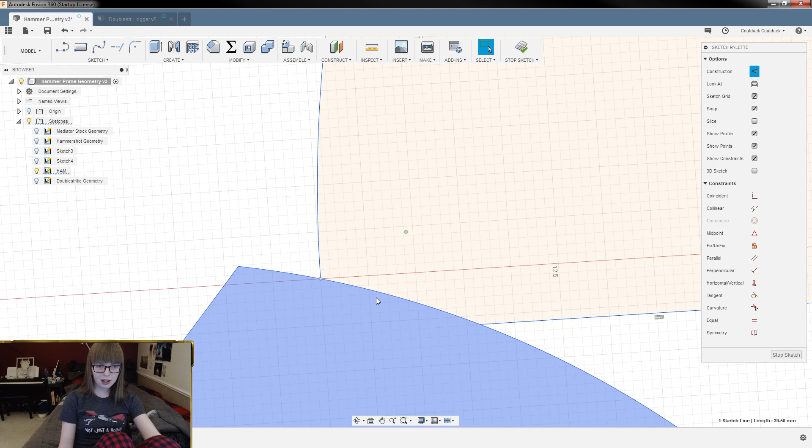But because of how this is designed, where it's basically as thick as possible and has as much contact patch as possible, I think you'll actually hit a point, like it's an exponential curve, right? You'll knock that first corner off in a second, and then it'll flatten out after a couple shots. And then it will continue to wear, but it'll wear exponentially slower. I mean, up until the point where you're up here. But at that point, you're fucked.

What's this going to be for? So this is, I'm gonna make a Hammer Prime Blaster. So, basically imagine if you made a double strike, the ultimate double strike, where all of the dimensions for the internals are mathematically driven, as opposed to somebody at Hasbro eyeballing it. And yeah. And then once I have that prototyping platform, I can do other stuff with it.

So I could make a revolver like a hammer shot, except have it be tiny, because the hammer shot cylinder has 5 shots in it, but the cylinder is large enough that you can fit 8 in it. So what if you wanted a 5 or a 6 shot revolver that was made by somebody in the community, right? If you were designing it for a brass tube or for 3D printing, you could have a hammer shot with a cylinder that was half the size, and you could even fit in 6 shots. I think I actually did the math, and you can have a cylinder that is like 60% the diameter of the hammer shot cylinder and still have 6 shots in it, which is more than the hammer shot.

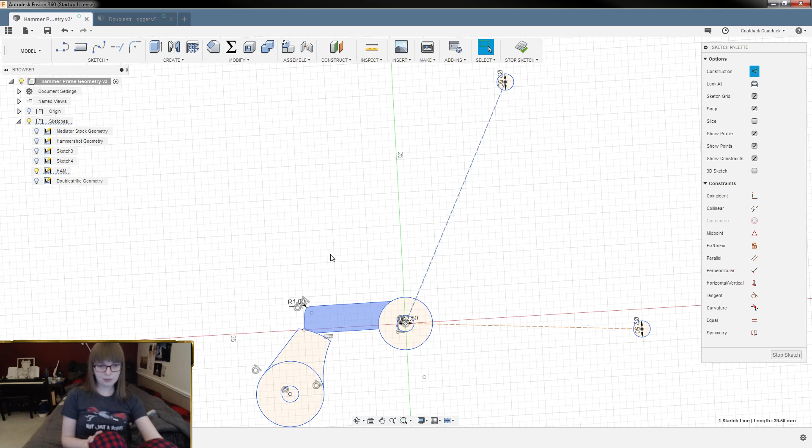And so basically I can just do whatever the hell I want with it at that point. I can put in a massive plunger tube if I want. And then have like an NIC grade one. Imagine the sledgehammer, which was a sledge fire piston inside of a hammer shot, but imagine that mathematically optimized. And then you could put whatever barrel length you want on it, right? And there's a couple of other things that I'm working on. There's actually 2 designs of loading method that I'm working on.

That is a radius of 4. Let me grab my calipers. So it's like 8 millimeters. Yeah, that's fine. Rear loading. Sure. Rear loading is absolutely a possibility if you made the cylinder large enough to get it out of the way. Yeah, you could do that. I mean, you can rear load on the hammer shot if you screw around with it a little. I need to get better at this mouse. So let's make this 8 as well.

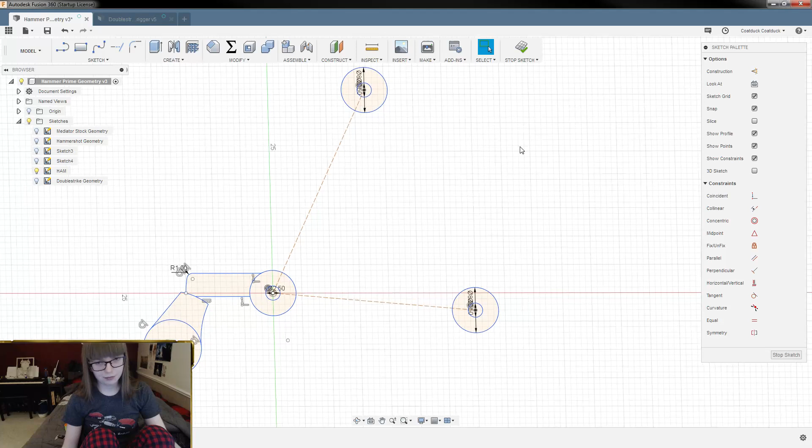Actually, no, see, because that's giving it a lot of extra range. And I don't know if I care for that. Like, the distance between... So, max distance between pivot point and... What is the pivot point, right? So that's... What is that? No, it's not telling me.

35 plus 4, so that's 39 there. See, so that's fine on this. Okay, I have a thought. If I turn on perspective, is that going to make things easier for me to tell what I'm looking at? Oh, I think it does. That's kind of handy, admittedly. Okay, so this is 39.5, and then add 4 to that. That's pretty big.

"I have to say you're the best mechanical innovator in the community right now." That's... I don't know if that's true. But I appreciate the compliment. And regardless of whether or not I agree with it, your opinion means something.

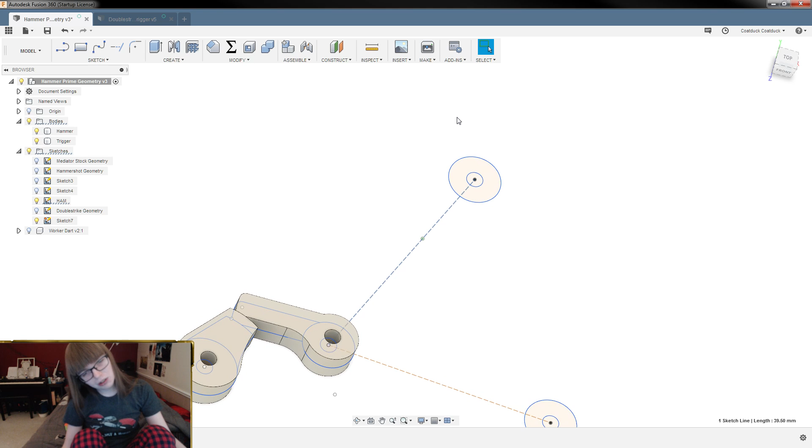Did I just mess that up? No? Got that right. Okay. Okay, I'm getting a little better with this mouse. This is all live, for the record. These aren't, like, pre-programmed moves or anything. I'm just trying to get more fluid with this thing. Yeah, this is weird. Because, like, the further I put this up here... This is weird.

Okay, I had a thought. "If you aren't, you're damn close." Thank you. It's very kind of you. I mean, admittedly, I don't want to take credit for every single idea that I've worked on, right? Like, this particular one, I had the idea, but I had the encouragement to work on it, and I had somebody else come to me and say, hey, you should do this thing, and I was like, I had that idea before, but it's stupid and I won't do it, and then he was like, well, actually, no, and then I did it. And that's Zambona, who has been a big influence on this particular project.

"People are doing cool stuff mechanically, but they aren't innovating on systems that already exist like you are." Fair. I think one of my biggest strengths is that I make things mechanically precise. Like I could have gotten away with doing what Hasbro did and just bringing this line in here and going, well, it probably won't contact. But I basically made it as strong as physically possible. And that's the same here, too. So this is as strong as possible while maintaining that clearance there.

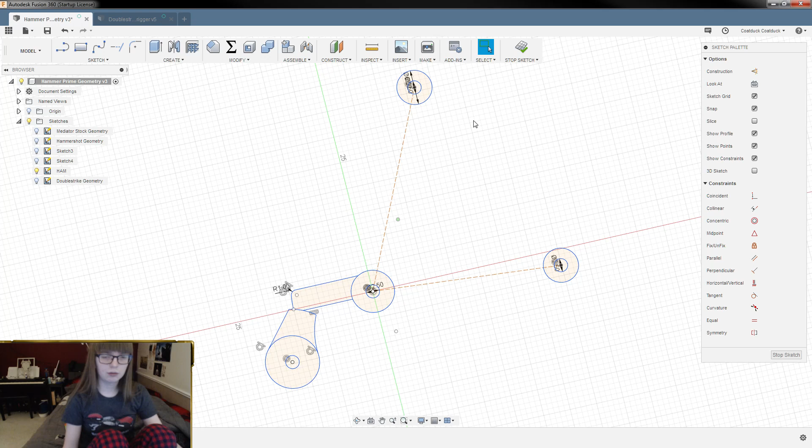Okay, so this should be 6.5. That's the sort of minimum radius you're looking at. Which is still a pretty big radius, but... Okay, so the hammer, I think I want it to be vertical when it's resting. Or maybe like 5 degrees behind vertical, so that when you press directly down... I got another double strike here. So when you press directly down... Doesn't matter that much, actually. That can sort of be fixed with ergonomics. Woo! Doing a spin.

Alright. So, how far can we go? We can go up 50, and then like 90 minus... That's 50... 40, I think. No, actually... No, that's right. And we also want this to be a construction line. So that's looking like about where your thumb would sit.

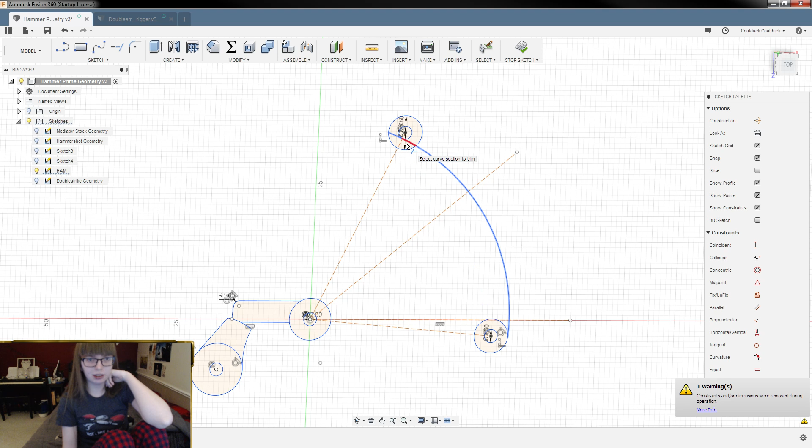Now the front of these holes, actually, they could be pretty uniform. They don't have to be, though, is the thing. That's exactly what I wanted. That's perfect. So all of the force here is compression, effectively. I mean, when you draw it back, there's a little bit of drag on the piston head, but it really doesn't matter that much. Again, this would be a great situation to use a Fibonacci spiral in, but that's not a thing in this software.

There's the little... Jeez. I have no idea how to do this. Alright, I'm gonna try something, and this might actually save me a lot of trouble. No way. Did that actually... Alright, let's try that again. Can I just make this tangent and call it a day? Oh, that's gonna save me so much trouble in the future. Holy shit. And by in the future, I mean right now, because I'm about to do that again.

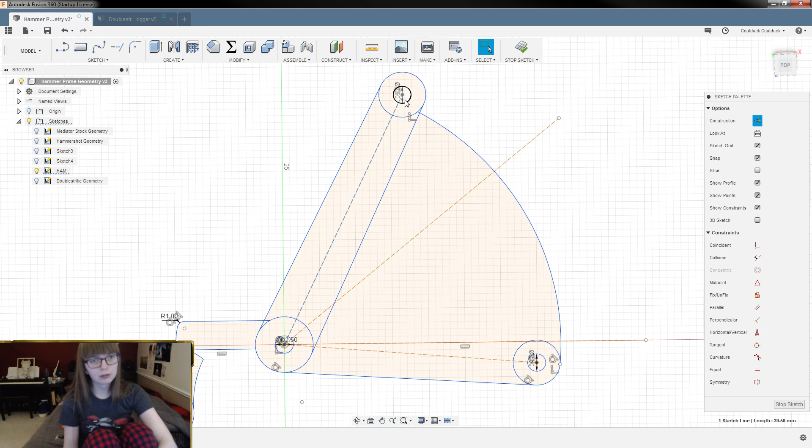Actually, it makes me want to be less precise so that I can know that it's working. I can't believe that is that easy. I've been overcomplicating that for so long. Alright. Nope, that's the wrong button. Right. Dear Lord. That is making my life so much easier. 2, actually. Okay, this is not going to be the most elegant thing I've ever designed, but...

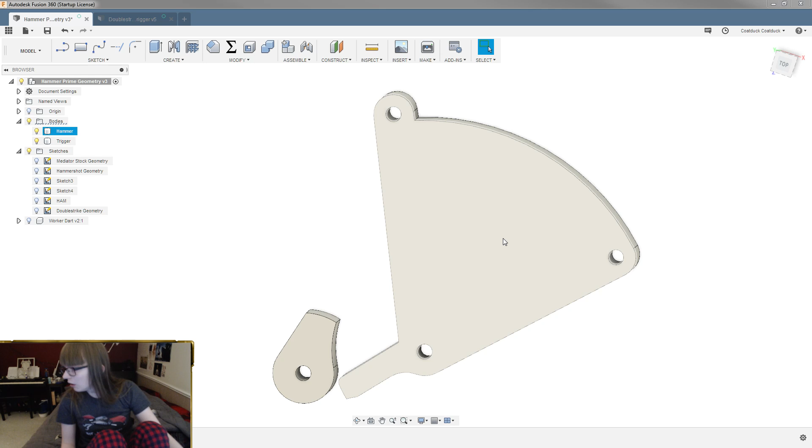So this needs to be lightened up pretty substantially, because as is, okay, so the most strength is going to be used along this line here. And then the rest of this is just dead weight. And the more weight we have, the farther out, the worse that's going to be for mass. Like, for inertia. You're going to lose a lot of force on your spring there.

Yeah, this is interesting. This isn't good enough for me. Like... actually...

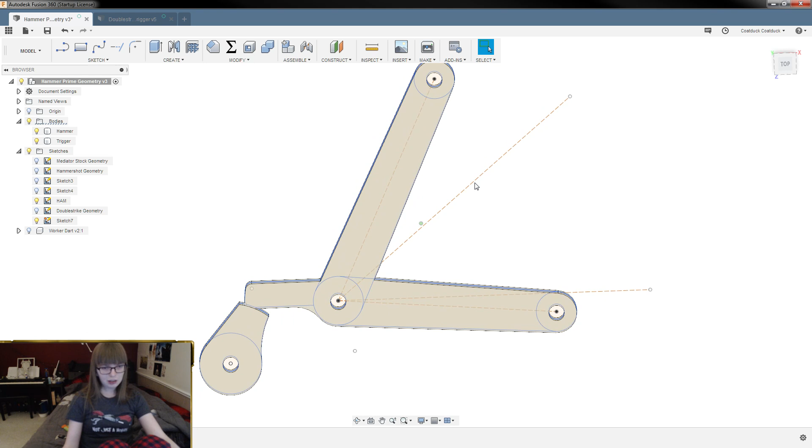I thought the movie was pretty good, and apparently it panned. Like, everybody hated it. Said it was horrible. I thought it was a really good representation of the book. I mean, it wasn't as good as the book, but for people with various disabilities and impairments, I thought it was a good adaptation. I thought it did it justice. But apparently I was the only one that thought that.

I'm gonna delete that stupid sketch. Literally did nothing. That was weird. Oh my god, is it trying to render... If I hover over these, is it trying to render these sketches as planes? It is. That's so bizarre. Well...

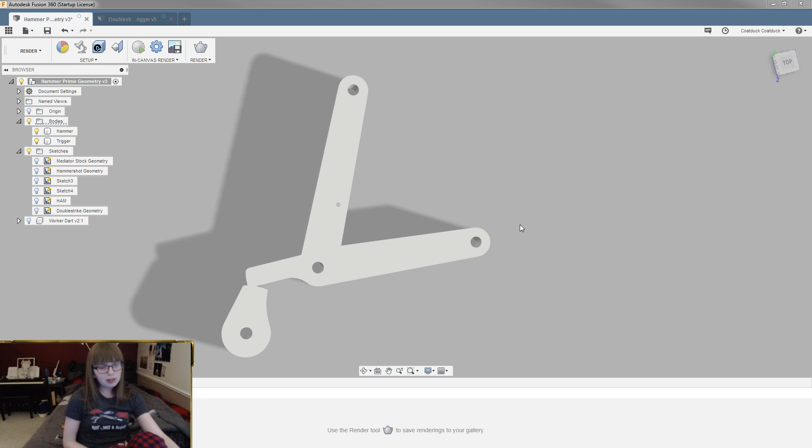So this looks functional to me. So I can draw on a trigger down here, and I can draw in a hammer out here. Although I don't have a particular arm for the hammer, so I would probably draw that in. And this is, of course, in the primed position. And then just be conscious of the fact that I have to make a circle that encompasses this. It might not actually be a bad idea to do two separate renders, one of it primed and the other of it unprimed. So like that.

Whoa, that's exciting. Alright, and then we'll make this tangent. Man, sometimes I feel like I'm a real engineer. Making so many people mad by saying that. That's fine. I can feel like whatever the hell I want.

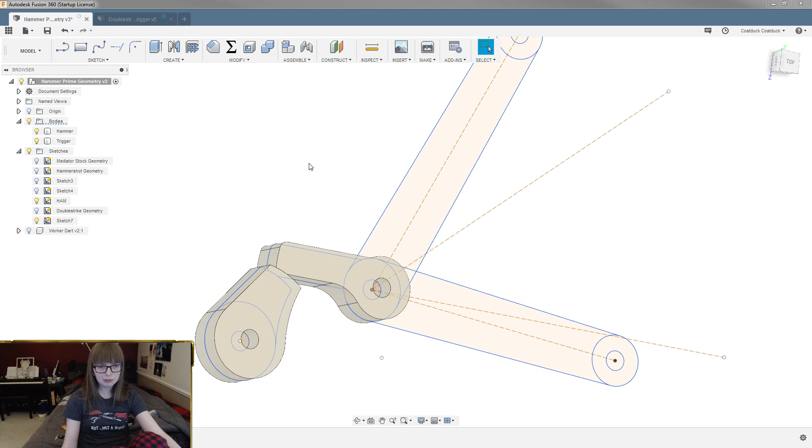Yeah, okay. Well, it looks like everyone's taking off, and to be honest, I'm actually really happy with even just these two parts. Like this sear surface makes me really happy. And when you consider that this geometry comes from the distance between centers, like the distance between pivots, and the length of the sear arms, so that the contact point is at a specific angle.

And then this surface is designed to be as strong as possible, and it mathematically is as strong as possible while not interfering with this piece, which is also designed to be as strong as possible without interfering. I think we did a pretty damn good job today, and I know this just looks like two stupid little parts, but it's not. This is some of the most complex geometry I've ever made, just these two interacting pieces.